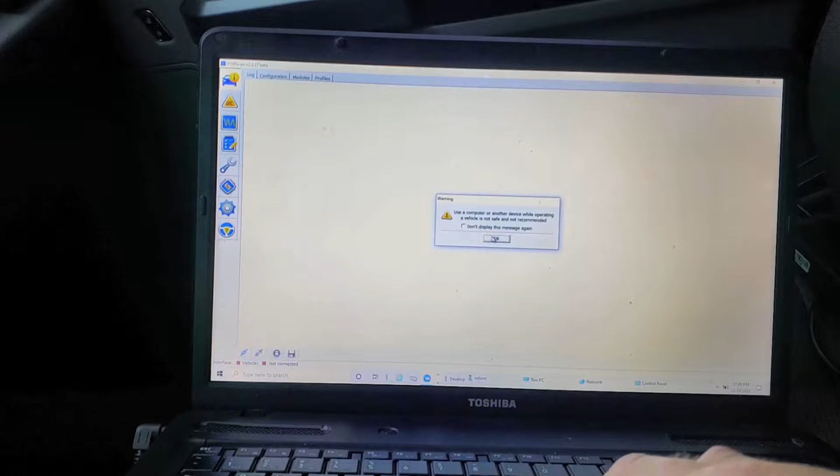All right, so down here in the bottom left, we're going to connect the vehicle. Make sure your ignition is turned on. Ignition on. Turn everything else off. Heat, radio, all that's going to be turned off.

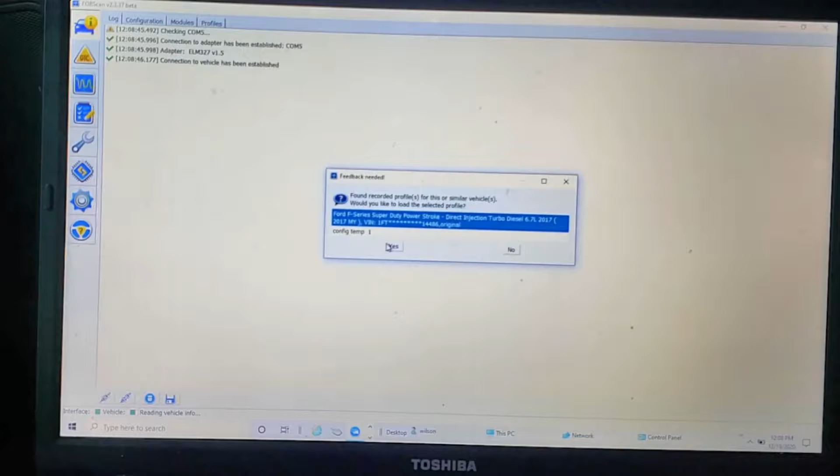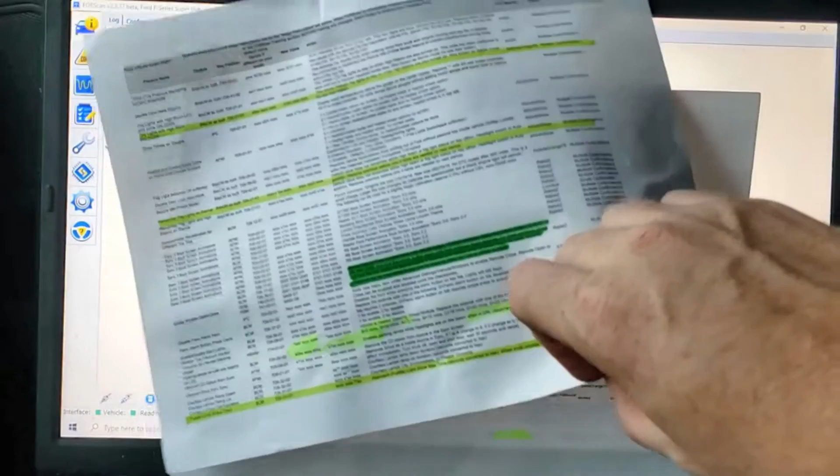Okay, I've already saved a file, so we're going to go ahead and select yes. And then what we're going to do is on the FORScan website and the Facebook pages, there is some Excel files. And what I did is I went through and I highlighted the ones that I want to do to the truck.

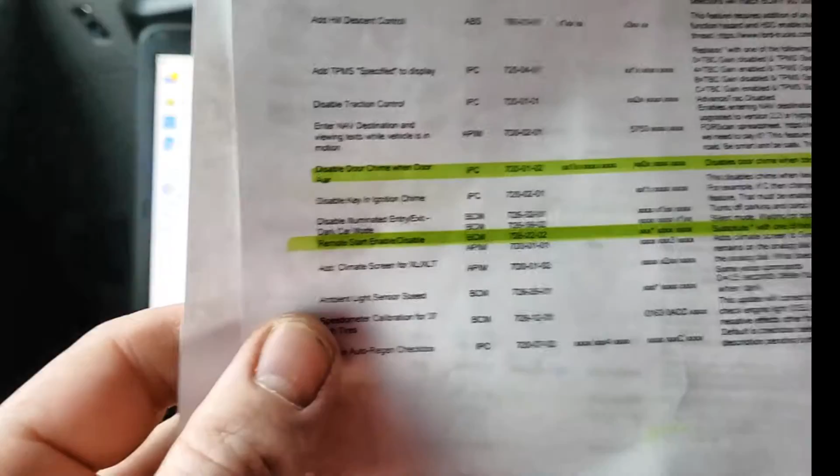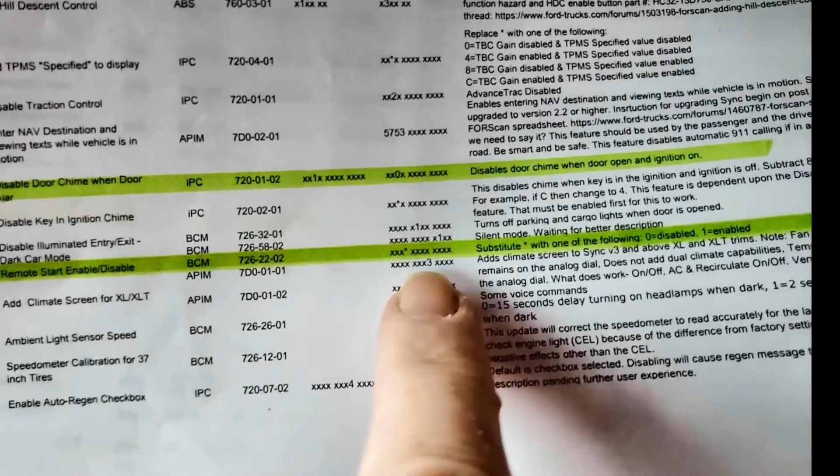That way, you can kind of see, you can see the numbers. These are the numbers that you're going to put in. Or this is the file that you're going to modify, and then you're going to change these numbers here.

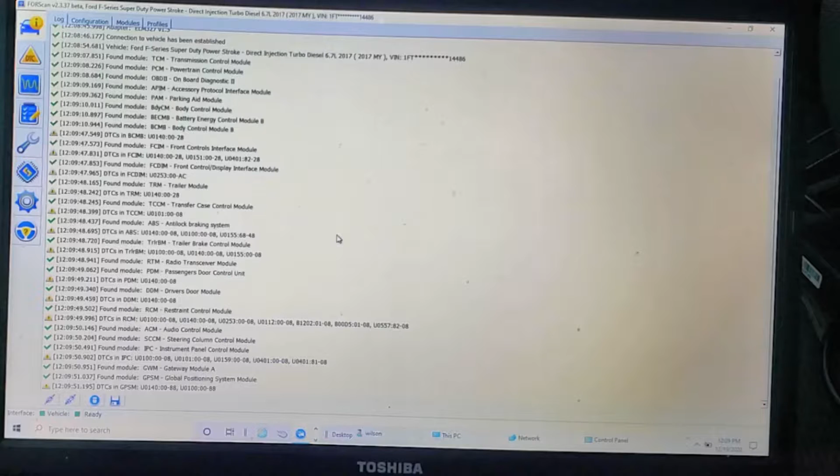All right, so set your switch, and then you got to flip it. If you have the one that automatically does it, you don't have to do this step. So then it's reading the truck. It says that we're ready, we're connected. Down here in the bottom, ready, connected.

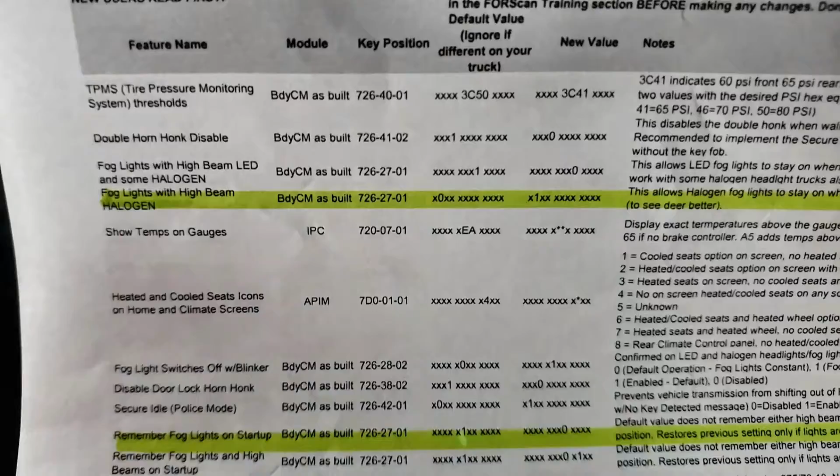So what we're going to do is we're going to look at the first thing that I want to do here. What is the first thing that I want to do? Fog lights with high beams, halogen, which is what I've got. So body control module as built.

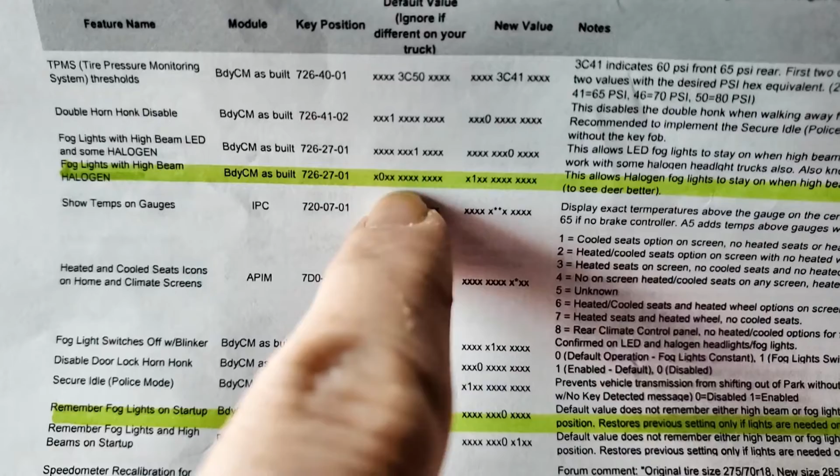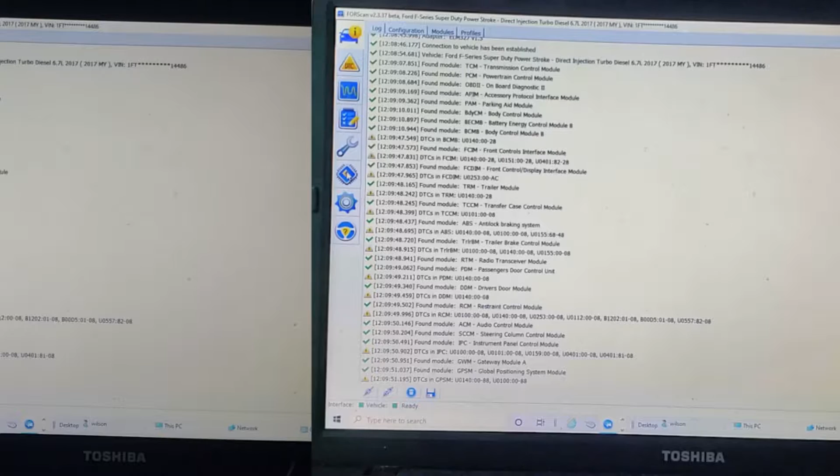This is what you're going to change. The 0, you're going to change that 0 to a 1. So let's do that. You're going to go to the configuration and programming, third from the bottom, and then right here, body control module. So you're going to play.

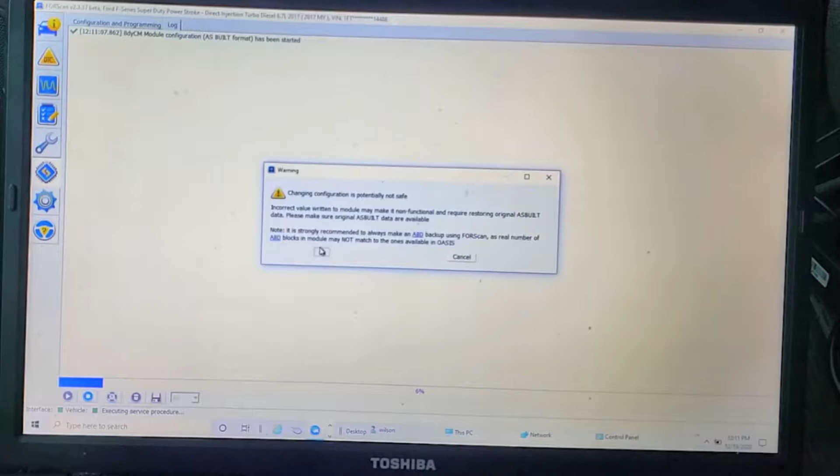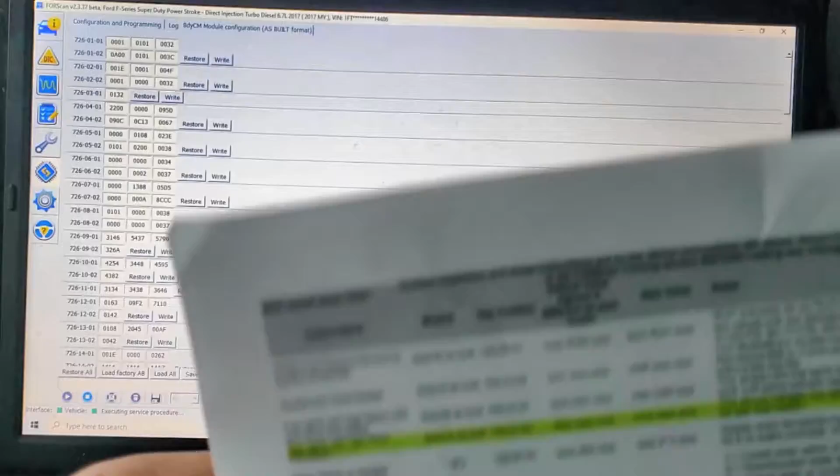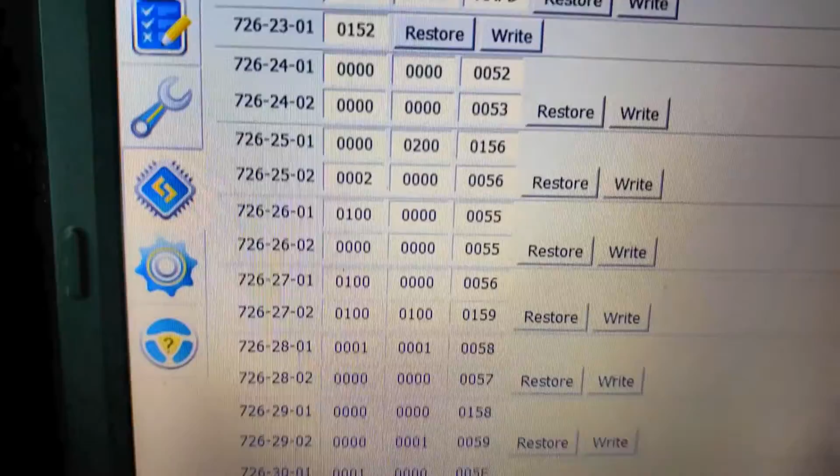Flip your switch again. Okay. It reads that body, and here we go. So now this is where you're going to do the programming. So what I say, we're looking at body control module 7262701. That's the one we're wanting to look for. 7262701, so you can see it here.

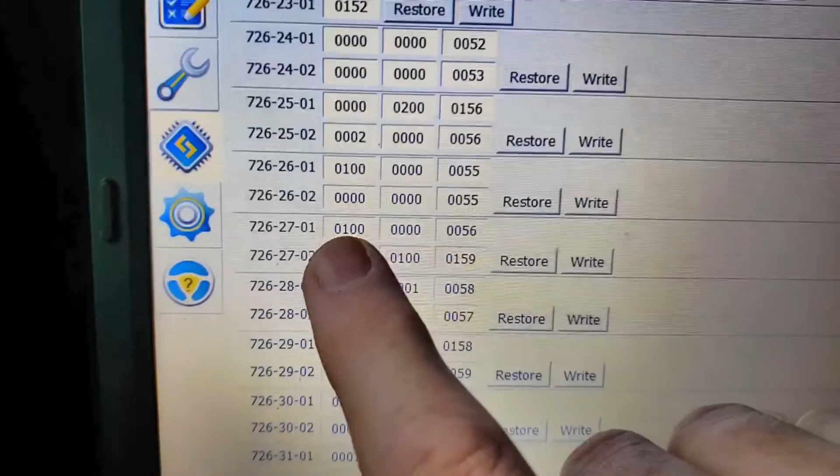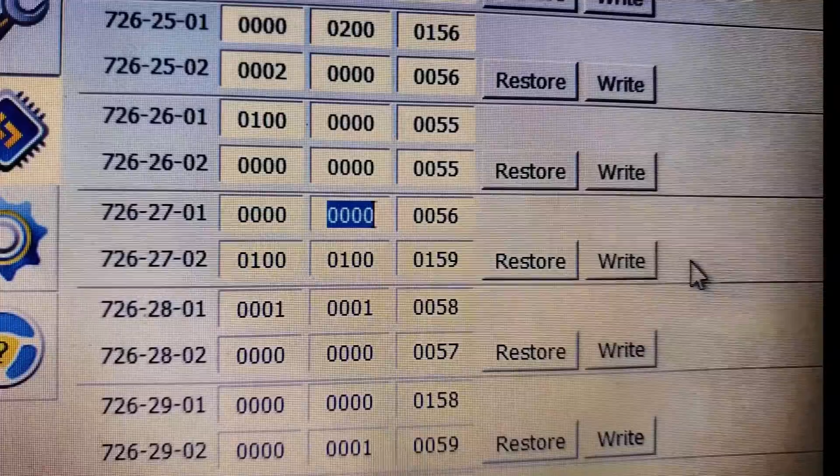And then the second number is a 1 because I've already done this. So what you would do, 2627, let's go ahead and change it. Just backspace that, get rid of it, add a 0. Right. Incorrect checksum of data entered. You want to go ahead and continue anyway.

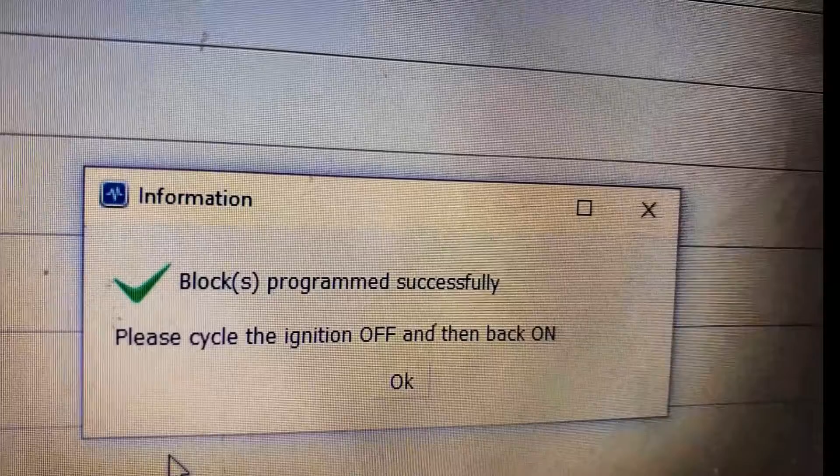Yes. So then it comes down here and it does its work. Program successfully. Please cycle the ignition off and then back on. Off, on.

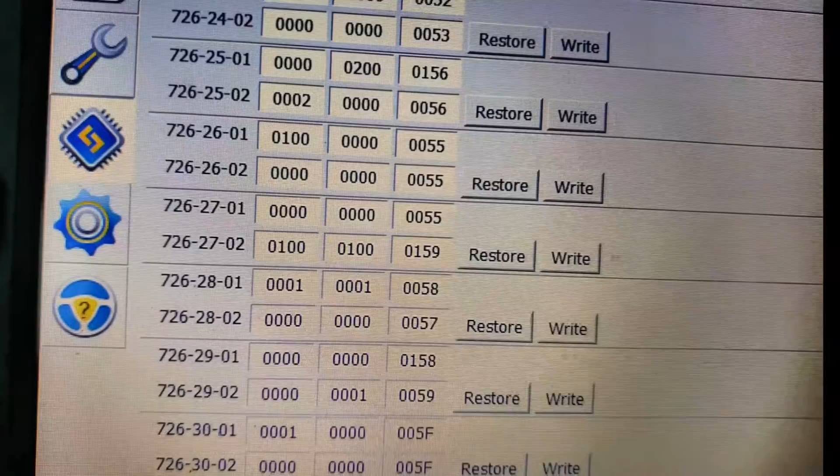And then okay, so that is written. So now I need to go back and change that back because I want them. So it's pretty easy, that module is done. It's body control module.

And then you just go down your list that you've selected and the things you want to change. So then remember, fog lights on startup was my next one. It's in the same body control module. So then I just scroll down to the number that it says 7262701, which is the same line that we were just on, but we'll change a different number on that line. This one here, you're looking at the 6th digit instead of the 2nd digit. And then you go through the same procedure, then you hit write and then cycle the ignition.

So then the next thing I want to do is a little more complicated because there's more steps. The power folding mirrors, I want to do it automatically. So when I lock the doors, they fold in. When I unlock the doors, they come out. So there's 2 steps to this one.

This one, you're going to do the same logic as you did before with the spaces and the 1s and 2s, but you have to do that in 4 different positions. So you have 2 different modules. You have the driver's door module, and you have 2 different numbers that you need to change in the driver's door module. And then you have 2 different ones for the passenger door. You got to do the same thing. So you have DDM, driver's door, and PDM, passenger door.

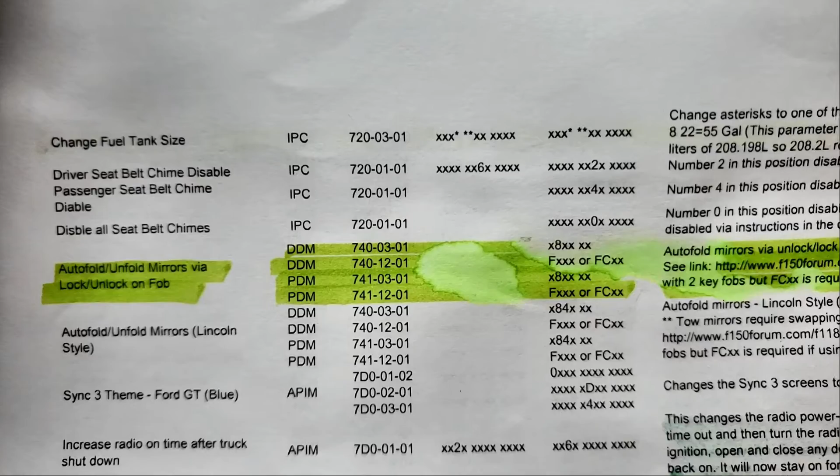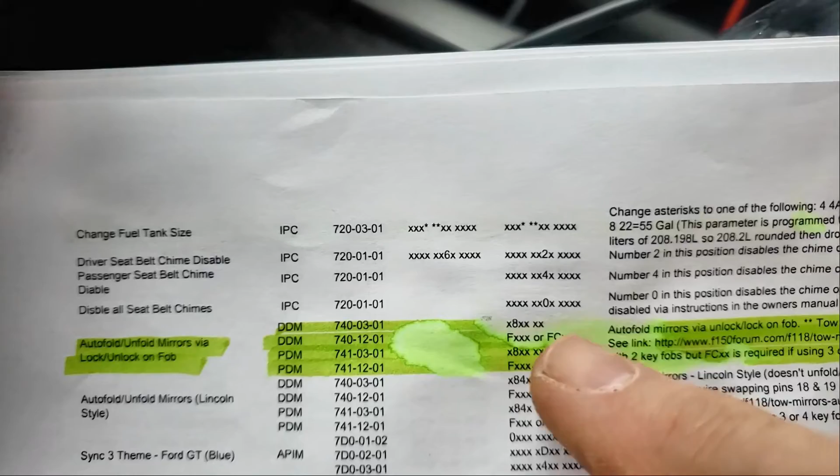So let's show you those numbers here. So for the auto fold unfold mirrors, you have the DDM and the PDMs. So you're going to change multiple different things. So the DDM, you're going to change your 2nd number to an 8, and then also the first is either going to be an F or you're going to do an FC, and that's all dependent on whether or not you have tow mirrors. And here's, if you can see it, I couldn't because I couldn't click on it.

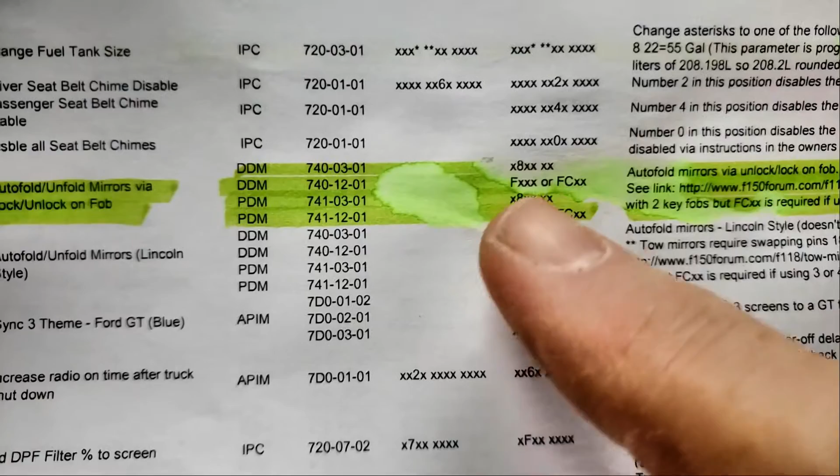I had to type in or Google what the website was. But what you've got to do, on top of changing these numbers and stuff for the passenger and driver door, you have to get into the pin over here.

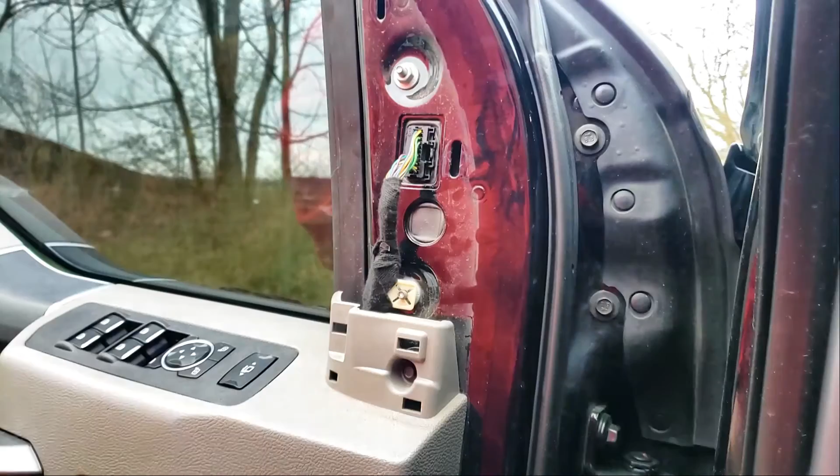To do the mirrors, you take the panel off, and behind the panel is your wire harness. So you take this wire harness out. The red clip comes off pretty easy. You pop the red up here, same thing on the other side, and then you can just kind of walk it off.

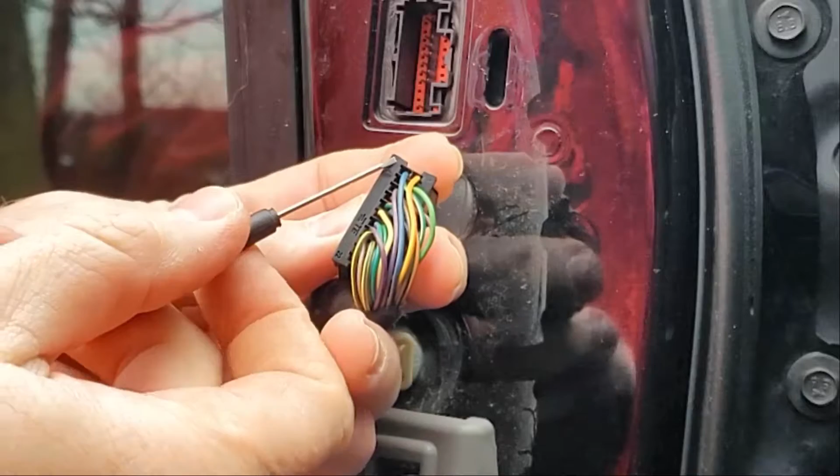On the back side here you have numbers. This side here is 12 to 22. To do the automatic mirrors, you have to swap pin 18 and 19. The bottom side here is 22, 21, 20, 19, 18. So you're going to take this pin here and this pin here, and you're going to swap them.

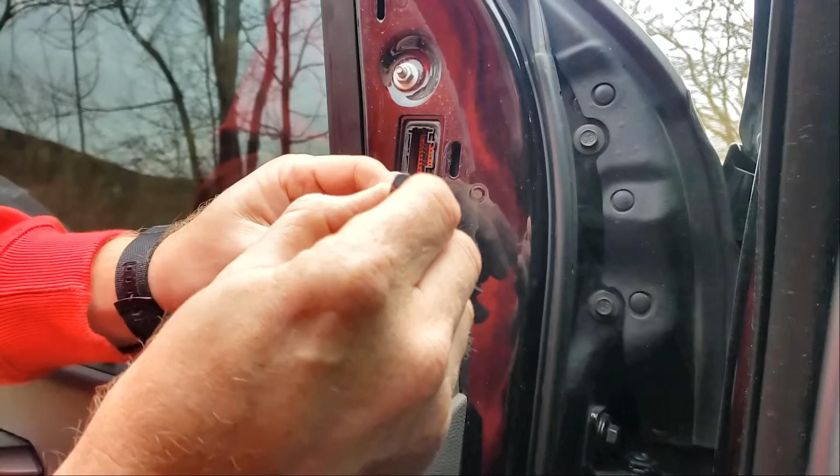To do that, it says to push forward a little bit and then take your screwdriver, make sure you're on the right one. So 22, 21, 20, 19. You come in the top side here, and I can't show you on camera because it's so small, but if you look in there, you can see a pin that you need to get up underneath. If you can get underneath that pin, it'll allow you to pull the wire back out.

So, 21, or I'm sorry, that's 22, right? 22, 21, 20, 19 - if you can get underneath it, you can pull that wire out. So it's not wanting to come out. Well, if I get up where I'm at, I can get underneath that pin. You have to have a screwdriver, but you can get up underneath it and it'll pop right out.

So then you take this one - this is actually number 18 because I could see it better - and then the purple one, and you switch that one. When you're done, once you get them switched, you just push it back in and it locks back into place.

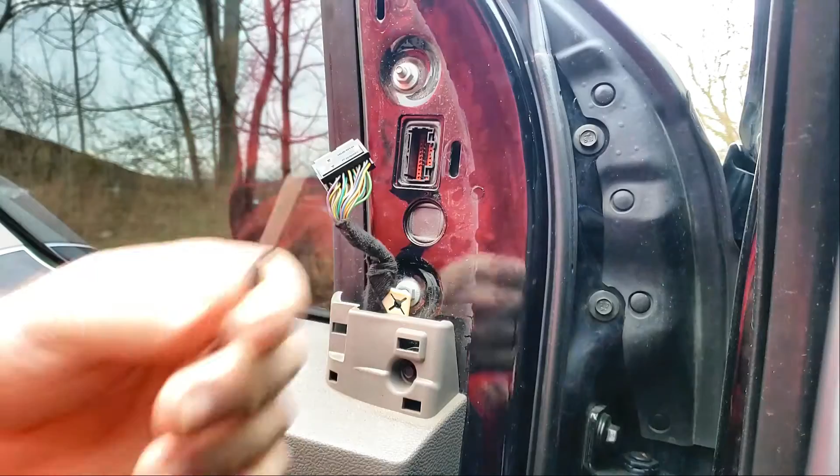This is the smallest screwdriver out of an eyeglass repair kit, and that fit. I tried doing other ones and they didn't fit too well. But you do 18, 19 on this, and then on the passenger side it's the same thing, same procedure.

When you're done, you put your little clip back. Doesn't look like there's a wrong way to put it back, so you put your red clip back in, plug it back in. Put your plastic piece back on. Door shut. Lock. Fold in. Unlock.

Pretty easy to do. When I first did it, the website wasn't very good about describing how to get the pins out. So hopefully that little clip I just did will show you where to put your screwdriver and how small of a screwdriver you really need to use to get those pins unlocked. It's not hard, take your time. You don't want to break those pins. That's probably the tedious part of the job, just getting those pins out. But it's really not that bad.